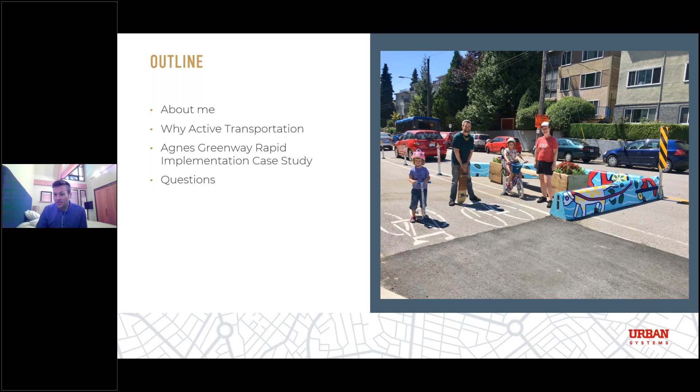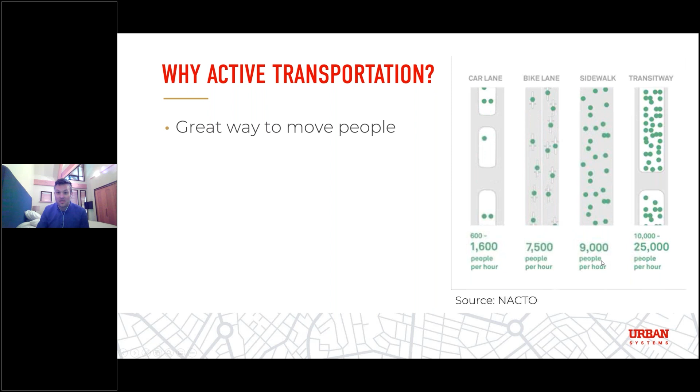Bike lanes, sidewalks, and transit can move significantly more in the same amount of space. So when we're working with limited space, it's important to make the most of it and think about what we can do to bring our communities together and allow healthy and active communities to make sense.

The next piece: active transportation is good for the environment, great for the environment. A lot of the emissions throughout North America and really around the world are related to transportation, and this doesn't need to be an area where greenhouse gases continue to be a huge challenge with the climate emergency that we're facing around the world.

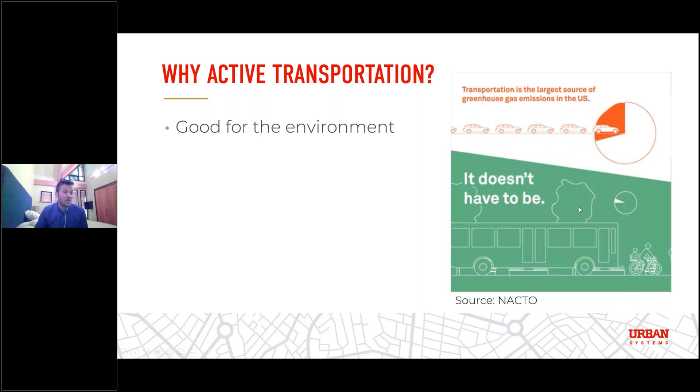I think there's a lot of excitement around electrification and the move towards autonomous vehicles, but I really think that scaling back and thinking about the simplest mode to connect cities and connect people is a more prudent approach and something that will be more successful in the long run.

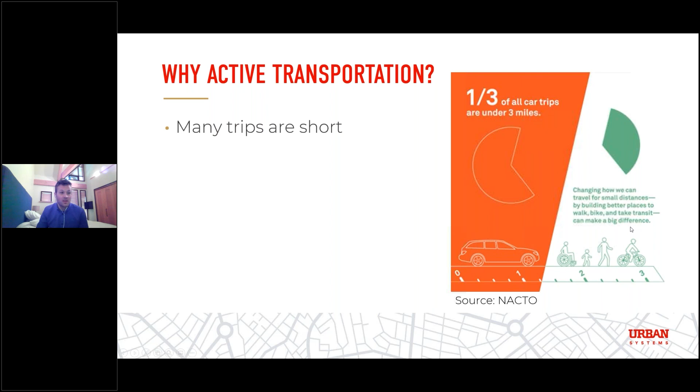Building on that, many trips are quite short. I can speak for myself: I live in Squamish and drive into Vancouver for work relatively often, but many of the trips I'm making throughout a week are short trips to the grocery store or to visit friends, and those are often best and most enjoyably captured walking and rolling.

This builds off some research Kate Hosford's done, thinking past the big ideas of why it's important to build all-ages-and-abilities cycling corridors. The graphic on the right shows that as the City of Vancouver continues to expand its cycling network with local street bikeways and protected bike lanes, the mode share of how people get around has correspondingly grown—locations with more density of all-ages-and-abilities cycling facilities lead to higher cycling commute shares.

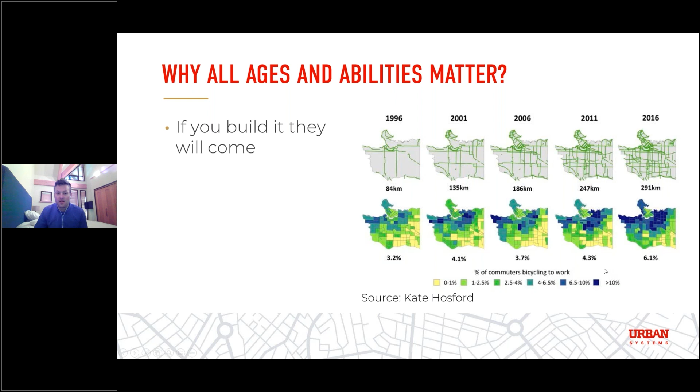So it's an important connection: this infrastructure really matters, and as we'll get into through the presentation about the Agnes Greenway, networks are really important too. With that background, I'll jump into the rapid implementation and the Agnes Greenway.

Running through the outline for the second part of the presentation—a little bit about the corridor itself and the project, setting the stage, and some of the policy work completed by the City of New West.

Urban Systems worked with the Federation of Canadian Municipalities in response to the pandemic and what people and cities were seeing, highlighting some key elements we found critical for making the Agnes Greenway a success, which can be useful when we expand past this and think about rapid implementation for other corridors.

Some of the engagement, activation, and monitoring we completed after the corridor was installed, then our process to get to the permanent design—the tender is closing tomorrow or in the next couple of days, so it'll be constructed shortly. Finally, some lessons learned that both us and the city have picked up and hopefully can apply to future projects.

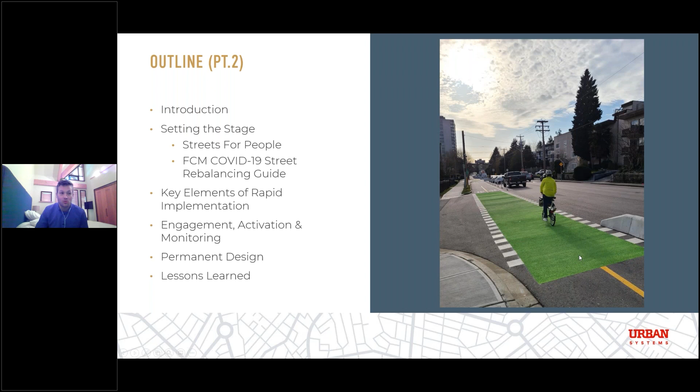A little bit about the Agnes Greenway: the corridor itself is relatively short, connecting Douglas College to Dufferin Street in New Westminster, just north of the downtown core. New West is a pretty hilly municipality, so this is a nice flat connection linking Douglas College.

Looking into future phases, the goal is to continue improving connection to New West Station on Columbia and 8th. The green line on the map shows a future connection down to the waterfront as well, another quayside area where continuing growth and new development will provide future access.

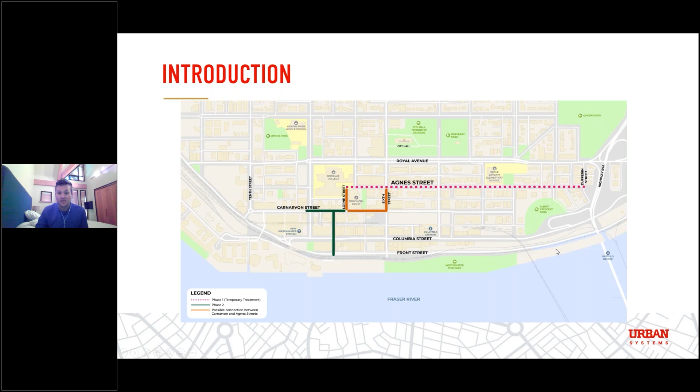A little bit about the timeline and where we came from: the approach we took, building off the city's direction, was to work with them to develop an interim design using low-cost materials that could be installed quickly, designed and installed in the fall and winter of 2020.

That allowed us to observe how it was being used and collect feedback through public and stakeholder engagement over the winter and spring of 2021. Building off that engagement let us make modifications to the interim facility, all working towards the permanent greenway, hopefully installed in summer 2022—a complete street with many dynamic elements. It's been a cool process to learn from the interim design findings and make the ultimate design even better.

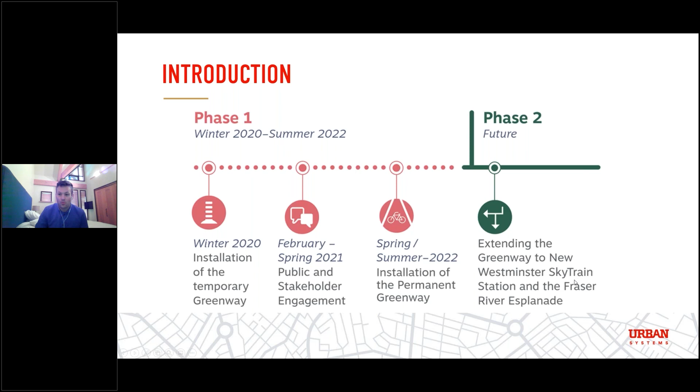And then future here, phase 2, as I was noting, a connection to the New West SkyTrain station and the Fraser River Esplanade. So those future connections will be looked at some future time.

And then a little bit of the background kind of policy pieces that led to this. As we all know, and the reason why we're doing this virtually, the COVID-19 pandemic has really had a pretty significant impact on our cities and our lives.

With that, the City of New Westminster was one of many cities throughout the world that responded to create some additional space for people and started a program called Streets for People 2020, which temporarily reallocated space and created additional locations for people to walk and bike and be able to physically distance and stay safe, especially during the early days of the pandemic when there was a lot of new and unknown things going on.

Another policy piece is, and I have more information on the coming slides, there was not a lot of guidance, so a lot of cities were scrambling to figure out what was the best approach to reallocate this space and what kind of tools existed.

So we worked with the Federation of Canadian Municipalities to put together a guide called the COVID-19 Street Rebalancing Guide that looked at a bunch of different case studies and provided high-level design guidance on different tools that could be used to adapt the existing streetscape into something safer and more comfortable for people during the pandemic.

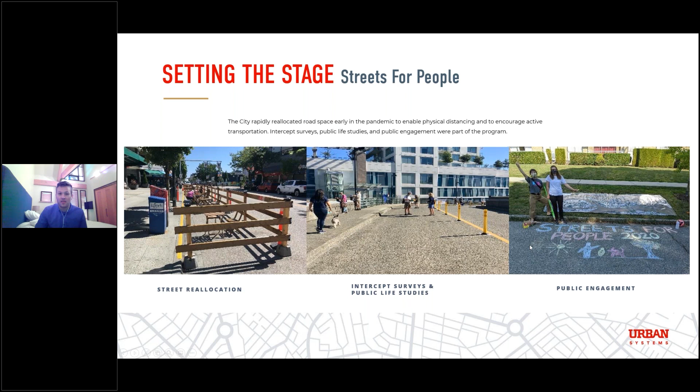The intent of the guide was to not be a super technical guide. It's really more of a toolbox that shows what is possible and helps communities learn from what others have done - something that helped inform the work that we completed with the City of New West on the Agnes Greenway itself.

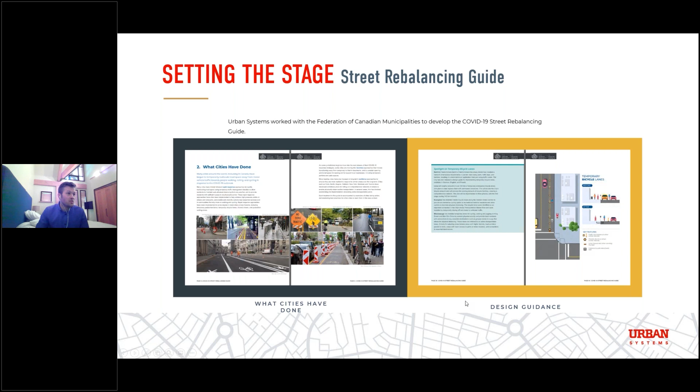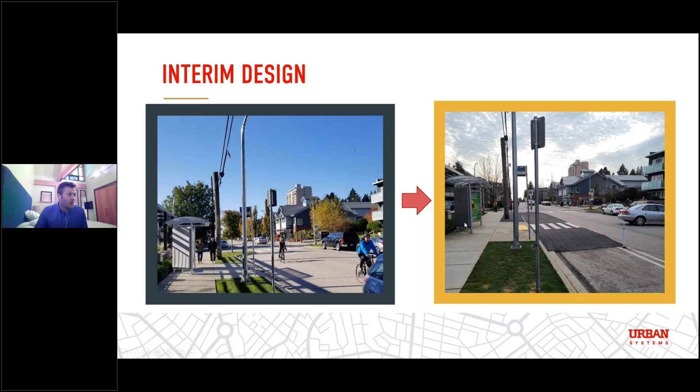So with that, I'll jump into some of the key elements of rapid implementation, and also a little bit of background on the corridor itself.

This corridor is primarily a residential corridor with multifamily buildings along the corridor, and parking on both sides of the street in the precondition of this rapid implementation. In order to accommodate this two-way cycling facility, the city and Urban Systems worked together to assess what different options existed.

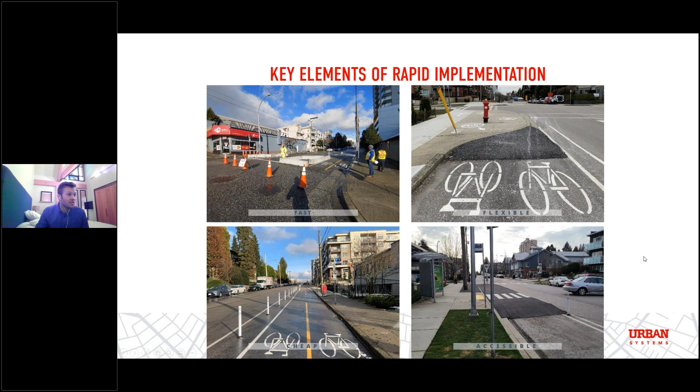So the first element here is being fast. One of the challenges often with infrastructure projects is the duration of construction, and the impacts to the community that are felt through that construction time can be pretty significant.

With rapid implementation - right there in the name - one of the main benefits is the ability to make changes quite quickly, so that community members aren't impacted as adversely, and are able to see what the changes are going to look like right away.

And so these 2 photos here are showing the day when the majority of the infrastructure was installed. I think pavement markings had been installed about a week before, and this was a nice day in December 2020. This photo on the left is first thing in the morning around 8 a.m., and then the photo on the right, when the last concrete barriers were being installed, was the end of the day, around 6 o'clock, maybe even a little bit earlier.

So just showing that the vast majority of the infrastructure was installed over just a handful of days. Signage came a little bit later, and then there was a rapid flashing beacon installed in the next couple of days.

But overall, the project was fully implemented within a couple of weeks and able to be used by community members, starting the transition for community members to learn what those changes are and how to use the street again.

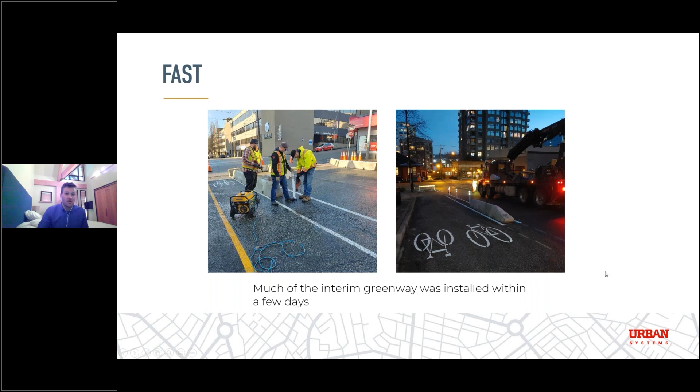And so building on that and using these lighter weight materials - a key for this project, and I think for many rapid implementation projects, is having flexibility to make changes. By using lower cost materials that are not fixed in the asphalt, at least initially, it allowed us as a design team to adapt and make some modifications as needed.

And it's something that I think will also make the permanent design better, as we have a stronger understanding of what some of the challenges and concerns from this rapid implementation version of the project are. I'm really excited to see the ultimate design, and when it's in the ground, how we've been able to learn where some of those challenges and sticky points are and adapted to those.

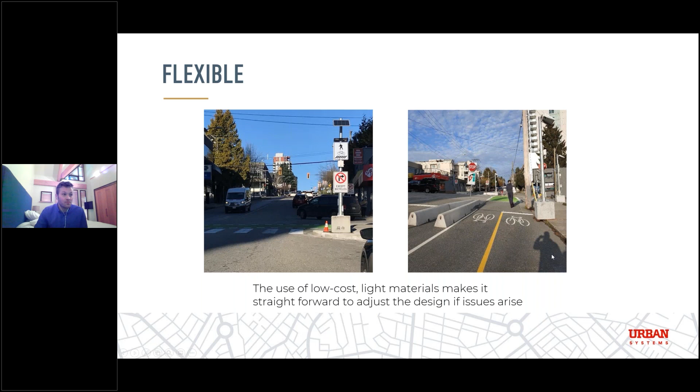So the next piece of this is cheap, and this is important to recognize. Anyone who works in this world knows that capital infrastructure is very expensive, and the existing capital budgets don't always allow the expansion of a network as rapidly as we would desire.

I think by using relatively cheap materials, it made the procurement quite a bit easier, and city crews were largely responsible for installing many of these treatments, or supporting the installation of many of these different treatments, working with independent contractors and installers instead of hiring a general contractor to lead the construction. It also meant that we were making the most of the environment that we had.

And so you can see this photo on the right showing a transition that wouldn't really pass the design recommendations of most design guidance, but for an interim facility, it's something that we as a design team felt was an option that worked okay - to create a facility and protection separated from motor vehicles that worked good enough, recognizing that we're not always going to have the perfect solution, but something that we can learn from.

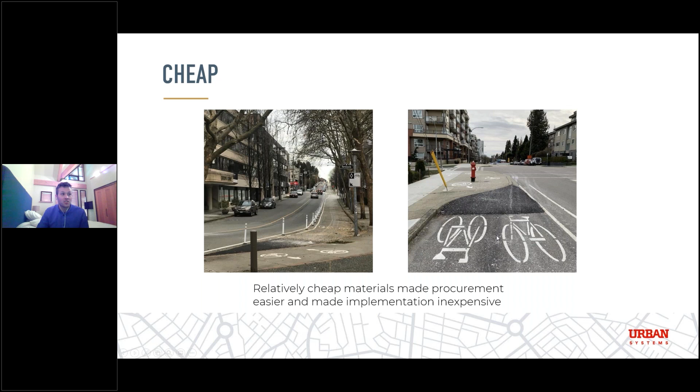This is actually an area in front of the elementary school, Qayqayt Elementary School, and an area where we heard from community members and made significant changes to our ultimate design that will make this intersection a lot more comfortable for all users. But in this existing condition, we had to work with what we had.

That meant using curb extensions as a kind of shared crossing location for people biking and walking. And then accessibility - one of the things that was really important to the city and to us was to ensure that accessibility wasn't forgotten just because we were doing this as a rapid implementation, semi-permanent design. That didn't mean we weren't going to think about what we could do to make it accessible for all users.

So we kind of built off of what the City of Vancouver was using for temporary bus islands or bus bays along Robson Street, and adapted that to our context here on the Agnes corridor to create a kind of pseudo floating bus stop where we provided level boarding and alighting space for people taking transit, but shared with cyclists.

And then to improve understanding of the expectation - this is a bus stop that doesn't have really high boardings and alightings, but even so, we provided some informational signage at the bus stop to help users understand what those interactions are supposed to look like and the design intent as they're using the facility.

So I think a combination of ensuring the design is done in a way that accessibility is forefront and a major consideration, but then working past that to ensure there's some communication tool that helps people feel comfortable and safe and know what the changes mean and how they're going to interact with those changes.

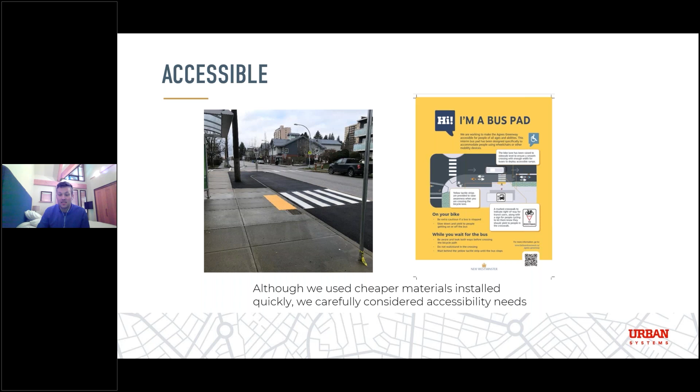That brings me to the next slide here, and the approach we took for engagement, some activations and monitoring. As I noted, the Greenway itself was installed quite quickly and in advance of doing project-specific public engagement. The previous downtown transportation plan and the transportation master plan had completed engagement, but not specific to this corridor.

So the first time that community members and stakeholders were able to - I think we did do some targeted stakeholder engagement in advance of the installation, but the first time we were able to hold broader engagement was after the interim facility was in the ground. And that allowed the lived experience and feedback of whether or not it was working, what concerns and considerations we had.

So we had two different online surveys, a bunch of different stakeholder meetings with the school community, with the strong cycling - the hub has a local arm, there's a walkers caucus in New West as well. So getting a variety of different user groups to provide feedback on how the facility was working.

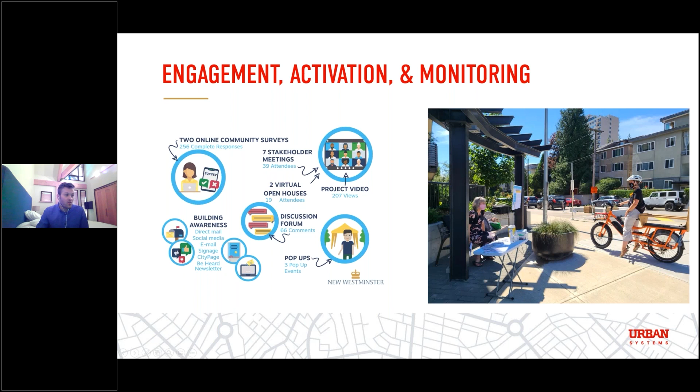And it was also great - this is the first project in quite a while that we were doing in-person public engagement. So this is summer of last year where we had a couple of different pop-up locations that we were able to come out and talk to community members and figure out their thoughts and concerns to help us advance our permanent design.

And activation - it's something that's neat, building off the location of the corridor and really having the Qayqayt Elementary School being kind of the backbone or a real key destination along the corridor, with a great park and playground, as well as the school and daycare at that site.

We worked with the community and with Happy City to activate the Greenway. So we added some planters with benches, and it's really cool to see - I was out there last week and saw people still out, community members connecting with different people sitting on these benches. Every time I've been out there since they've been installed, there's people using the space and reclaiming some of this road for people, which I think is great.

Another thing Happy City led was working with a local artist to do a paint-by-numbers type activity on some of these barriers. The low cost, rapid implementation approach sometimes leads to infrastructure that's not the most people-oriented or attractive for the street, so this was a nice touch to engage and connect with community members. Kids and families came out to help paint these barriers in front of the school.

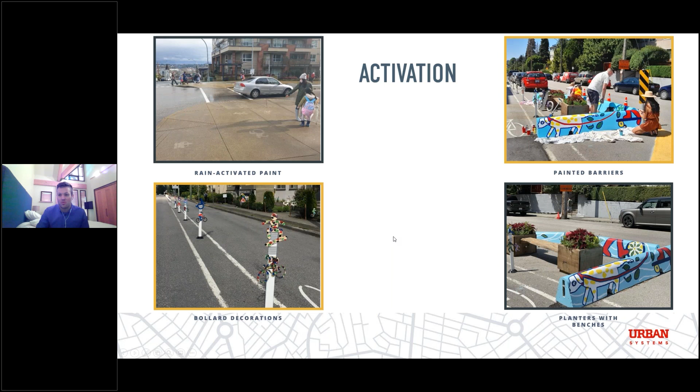Then monitoring. Another key part of our design process was ensuring we captured before-and-after data on how people are using the corridor, looking at parking occupancy, traffic volumes, and speeds.

Something unique about the corridor is there are laneways both north and south that run most of its length. So we weren't only looking at impacts on Agnes Street itself with the one-way street modifications, but also wanted to see the impacts on the laneways on either side. With a significant amount of parking removed or reallocated for this project, we wanted to understand the impacts along the corridor and in the broader community.

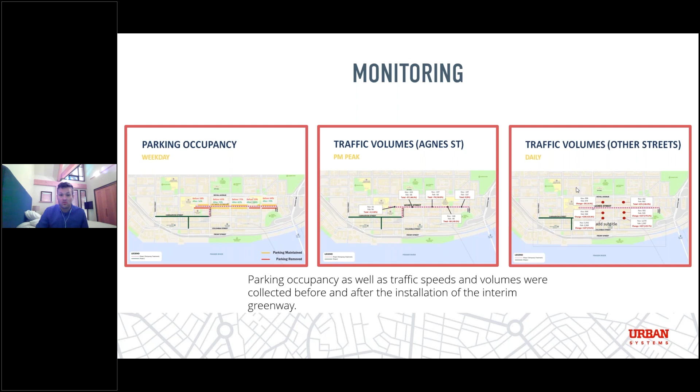One finding from the traffic and speed study was that travel speeds and volumes in the laneways went up a little bit. So one mitigation measure for the ultimate design is to add traffic calming through those laneways to reduce travel speeds at a minimum, and hopefully reduce volumes as well.

Another area where we spent quite a bit of time was transit routing. As you can see from the floating bus stop, there were two transit routes that, before the Agnes Greenway, traveled both east and west on it—Route 103 and Route 105 in our pre-routing—both connecting to the New West SkyTrain station on Columbia Street and 8th. With the proposed changes and one-way street conversions, these routes needed to change.

Recognizing there are pretty significant grades down to the Fraser, as we worked through different routing options we learned about the challenges each would present and how people use these routes. There's a significant number of users who are not as mobile as others, so these changes—even though on a plan it's only a block—can be fairly significant given the grades and how users rely on this route as a primary transit source.

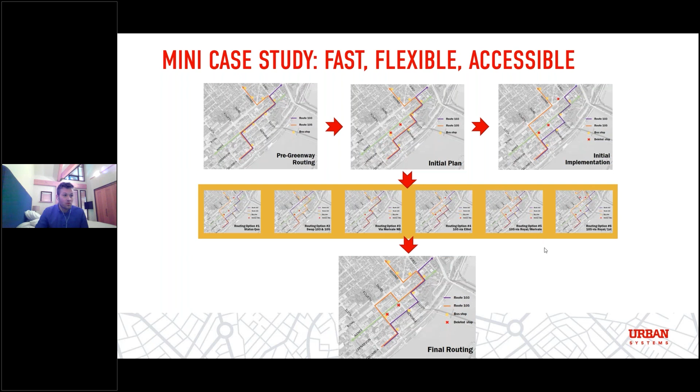For the accessibility piece, we were thinking about bus stop design, but routing design also has a big component in accessibility, recognizing the grades in New West play a significant role in how people are able to travel. By creating a route that allows access to stops on the same plane, I think for the users who are comfortable and used to traveling on these routes, that's something we were happy we were able to achieve in the end.

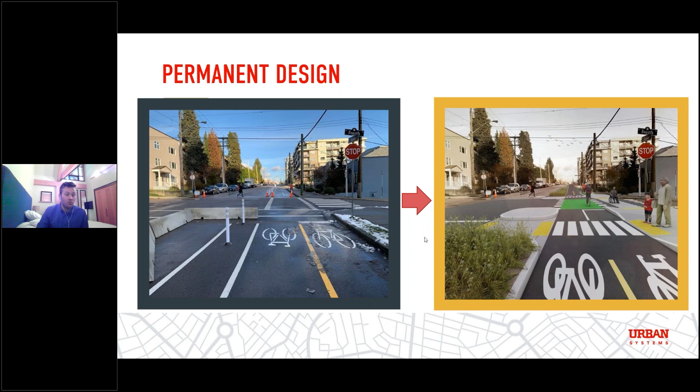As I mentioned at the start, our tender is closing any day now, and this will be constructed in the coming months, which is really exciting to see what it's going to look like. So what started as a pretty small design team at the city really expanded to take advantage of the multidisciplinary skills I'm lucky to work with at Urban Systems.

Our team grew, and we used skill sets from green infrastructure, landscape architecture, and other design components like transportation and civil design, to create a design that works for the City of New West. There's a handful of faces here from the City of New West as well. It was a fun process to be part of, taking the learnings from the interim design and really applying them to create what I'm sure will be a really exciting project once it's finally constructed, coming soon.

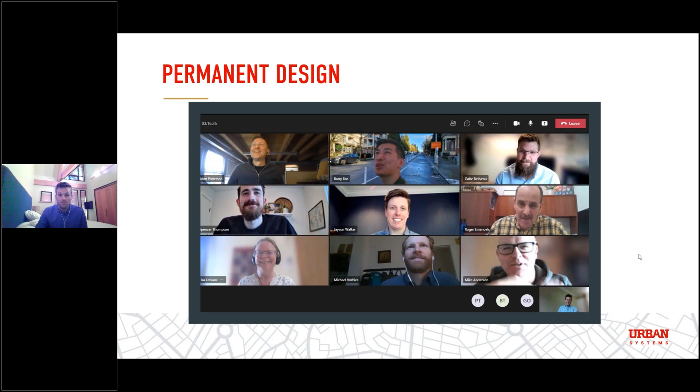So some of the key improvements from the interim design to the permanent design. One is a new closure — we're closing Blackwood, a small half-block street. Based on sightlines and network connections, we decided with the city to identify it as an opportunity, and we engaged community members on that during our public engagement. This is going to be a cool space with a new dog park and a little micro park with seating areas and some green infrastructure.

The modified transit rerouting reflects changes based on feedback we heard and the design for the intersections. For traffic calming, the laneways on either side are going to have traffic calming features to reduce travel speeds and hopefully traffic volumes as well. For enhanced accessibility, the ultimate design includes two new raised intersections, a raised crosswalk, and a handful of curb extensions along the corridor.

For green infrastructure, we were working with the city's drainage team to find opportunities, and with their parks and landscape team to integrate urban design treatments and placemaking into those green infrastructure and public spaces. We're also enhancing the tree canopy — where possible along the corridor we're adding new trees, creating a space that's really nice and people oriented.

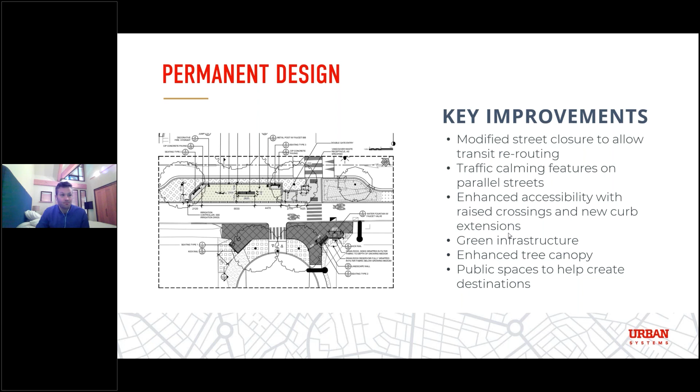So, final slide here: lessons learned. You can see I forgot to change the image — that's the closure at Blackwood again. Anyways, some of the lessons learned, and I saw a couple of questions pop up that are maybe on these topics.

Communication through multiple channels: one thing we heard when the rapid implementation occurred was that some people hadn't been informed or didn't know about the project. We did mail out notices to all the properties along the corridor, but it happened relatively close to when the actual changes took place. So that was something some community members felt — they would have appreciated additional communication through different channels, reaching them sooner.

Be prepared to make mistakes. One of the nice things about these flexible designs is that if you make a mistake, you're able to address it by making a change. It's significantly easier than with hard infrastructure installed into the ground. Perfect can't be the enemy of the good.

That was one of the things along the corridor, especially for this interim design, recognizing that future changes are going to happen quite soon in the case of this corridor, and that making some of the more significant changes right away probably isn't worthwhile. So it was important to recognize where some flexibility in our design parameters was required to make a facility that ultimately provides that connection, but maybe isn't as separated from the pedestrians as we would have liked.

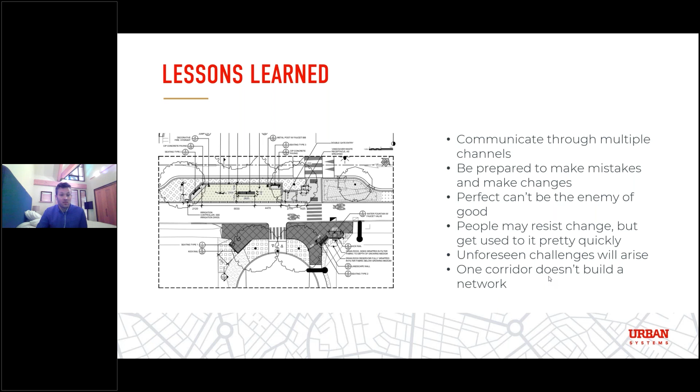I think that's one of the great things about rapid implementation - it really allows those capital dollars to be spread a little bit further and create more corridors that ultimately do a very good job without maybe being perfect. So those are some of the lessons learned, and that is it.